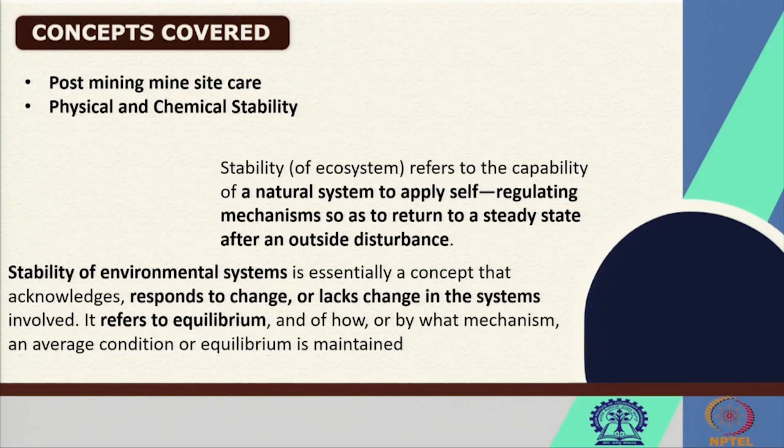Post mining site care is basically after the mining is over, when nobody will be there to take care of the situations. At that time, nature by itself should be able to withstand, to a certain extent, the disturbing forces that may be occurring. So that means we will have to maintain a stability.

This stability of the ecosystem there, that is whatever is existing there as life supporting, as your environmental conditions, their stability is required, so that the natural system by itself has got its self-regulating mechanism, which will be maintaining a balance, a steady state.

That is exactly where we will have to focus while designing or while recommending certain activities in the post mining site. So the environmental systems should be stable.

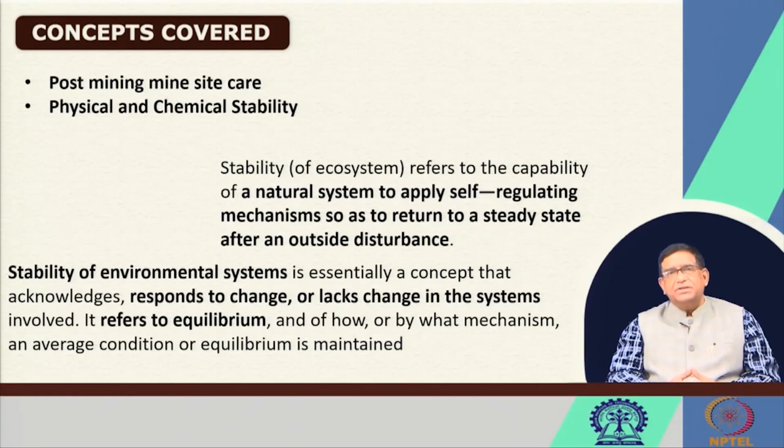That is, whenever there are any changing forces, any disturbing forces, if they come, then it maintains an equilibrium, so that the system itself comes back to its original conditions, or it is capable of withstanding the disturbing conditions. That is why physical and chemical stability are to be looked into.

So we can design when we know the factors that can affect the stability. In your studies for mining and mineral processing, you have already studied how to design a pit slope, design an overburden dump slope. You also knew how to design a tailing dam, and how you would exactly dispose of the chemicals over there. That is your STP, ETP - all these things are studied at different courses in your curriculum.

But today we will be knowing that, considering those factors when you design, what type of landscape you will be producing after mine closure. That is why mine site stability design is basically something you will have to take care of by proper landscaping. That landscape planning and landscape design will have to be done maintaining the chemical and physical stability.

So in today's lecture, I hope you will be able to identify the factors that affect the physical and chemical stability of the post mining site, and at the end of this you will be able to explain why we need post mining landscape design, and then identify the basic objectives of that.

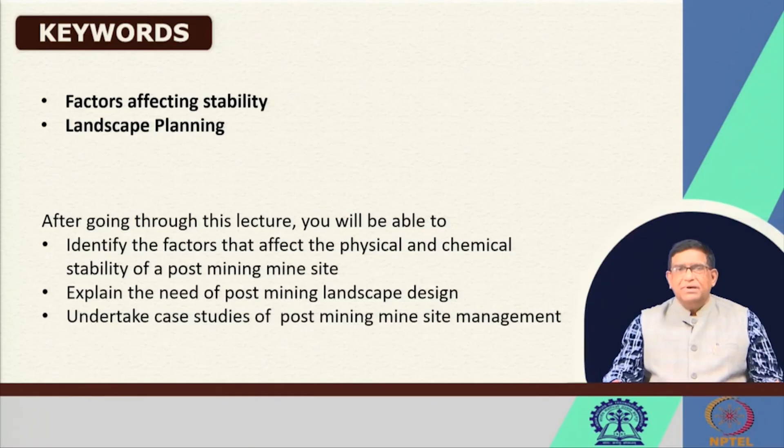So that you can identify whenever you go to any Indian mining site where we are lacking. There are many places in our Indian mining conditions where our post mining landscape design and stability management has got a lot of work to be done.

So, saying that the physical and chemical stability issues - you must know that the post mining site will be having some mining and processing waste, there will be residual structures, and there will be mined out structures: the pit, the benches - these are the mined out structures. Even the overburden dump, the way you have formed a heap, that is also a mining structure.

Now in these structures you can have different types of waste disposal systems. When you make an open pit, you have got waste piles, dumps. If you are having a hilltop, you can fill up the ridges, and there could be a dump over there. There could be a tailing pond where you can keep it. There could be a concentrator or thickener, from where you may bring a slurry pipeline to fill these tailing dams, and there could be an embankment - you have given and structured this bank, a dam is created over here.

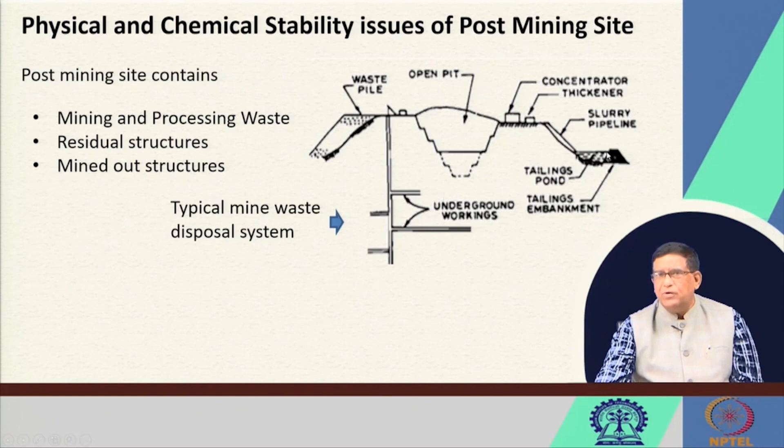There may be underground activities where you might have kept a lot of void, or which may be intervening your water resources, and all these situations may be there. Now, each of that can lead to certain instability. This tailing dam may collapse, the material you have kept may get slided down, then whatever water you will be putting over here, because of rain and all that, it can overflow and come out. Or if this particular slope gets collapsed, then the whole material will come over here, and if there is already water, that water and slush or mud may overspill and bury the whole area. So there is a lot of situations under which instability, a very difficult situation, may arise.

And then the chemical stability of that area is the resistance to attachment by chemical actions. In material science, a chemical substance is said to be stable if it is not particularly reactive in the environment during normal use. So wherever these materials are kept, how they may be reactive, if they spill and come over here, the whole soil can be destroyed.

If these particles get moved from here because of wind or rain, their chemical properties, if rainwater coming over here percolates down, it can become toxic, it may go to the water table, and then the water may become undrinkable. Similarly, the soil may be having a lot of heavy ions that can migrate from here, and they may give rise to effects going into the food chain and affecting your health.

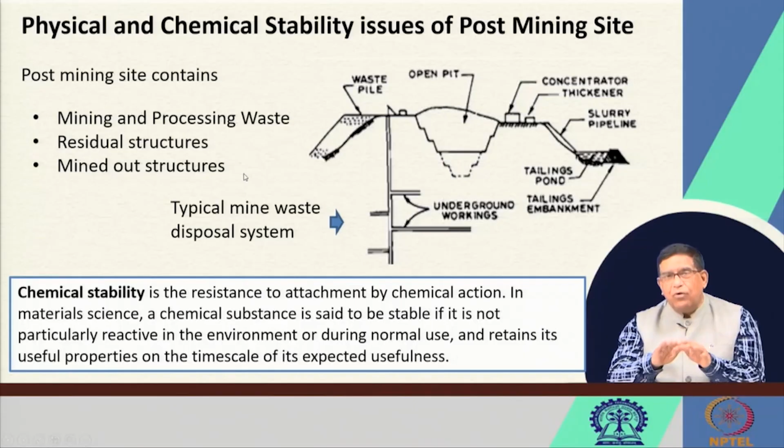So the chemical properties of this material, if it has toxicity, we will have to retain it, we will have to see that it is stable, that it does not migrate, does not move from one place to another. So this is chemical stability, meaning whatever way you want to keep it, you will have to keep it over there, and over the years that should remain normal and should not affect human health. But this does not always take place.

Now, if this type of disaster is to be avoided in the post-mining mine site, there is an issue that even after the mine is closed, after 10, 20, or 50 years, such problems may take place. This instability at the Chuquicamata mines in Chile was a big disaster, when the overburden dumped there collapsed, and the school below that overburden dump got buried, killing all the children over there. So that's why, even when it apparently looks stable, we do not know unless we properly study it. So the stability study is a very, very important issue.

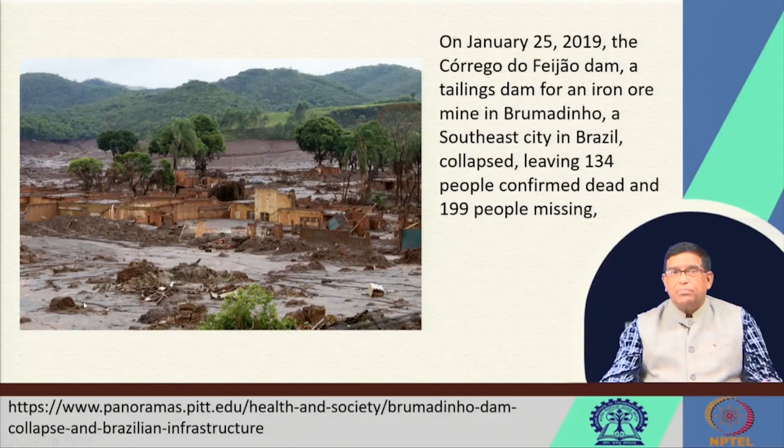And then there are many places, like for example the tailings of the Sukinda chromite mines of Tata Steel. The type of dam there is an above-the-ground tailing dam. It has been very well designed and is monitored, but if we do not monitor and keep track of its stability, in future it may also collapse. So that's why, wherever it is working well, you still cannot relax - you will have to take certain actions so that its stability is maintained.

So the physical stability of the site is the ability to remain physically unchanged, so that it should not collapse and give rise to problems.

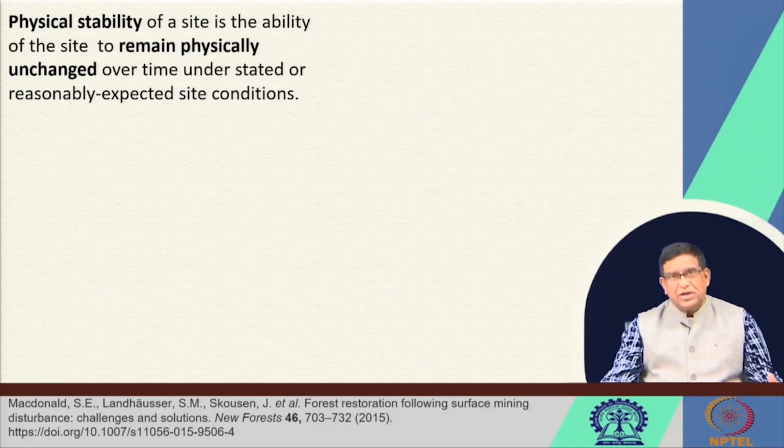Now, after the mining, you can see that the site is very unstable here, because unstable means that particles will be moving around. If such a situation is kept, they will be vulnerable to wind erosion, and under the rainwater there will be gully formations, there will be silt, and your fines will all be migrating from that place.

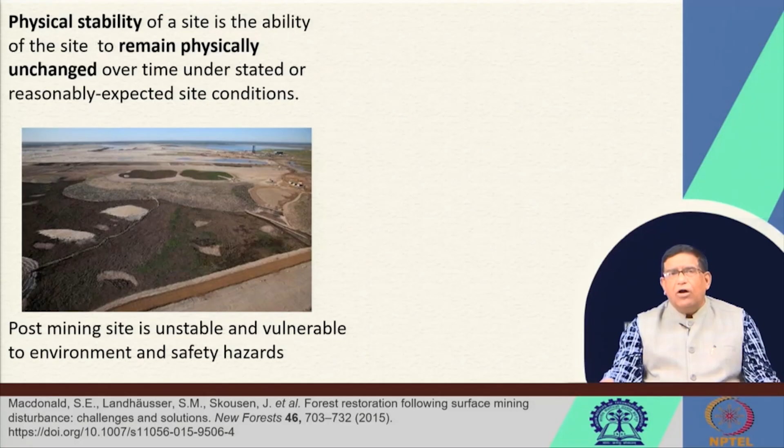But a stable site can be designed. This is one which has been designed and constructed. Now when they have given this grass cover, there will not be any wind erosion here. So you can imagine that it is possible. After the mining, care must be taken of the post-mining site, so you will have to go for landform reconstruction; after the minerals are taken out, the mining work is not over.

So that is exactly where your sustainability planning and your mine closure planning will have to be done, and these activities will have to be done with their economic aspects. That's why during mining you have kept your escrow fund, and I have been repeatedly telling you to do further research: whatever escrow fund has been kept in India is meager, very minimal. With that we cannot ascertain post-mining sustainability. For that we will have to do a lot of work.

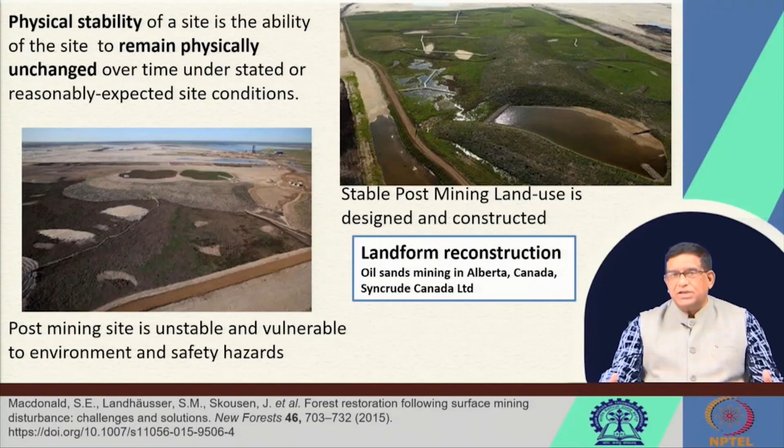Landform reconstruction is for the physical stability of the site, to remain physically unchanged. The matter of concern is the soil surface, dams, pits and water courses, because if the water courses, the rivers, the rivulets, the nallas get destroyed, it has a far-reaching impact. So there will have to be the required physical changes. We'll have to do the landscaping, stabilizing and enhancing uses. If you have small rivulets, that rivulet should not cause flood.

So some of the overburden dumps and materials can be used for creating an embankment, so that there is not going to be flood, because near a mining site, if there is a rivulet or river, definitely a lot of silt and suspended load will come from the mining area. And if at high flood time the river water floods, the nearby area will be getting all that suspended material. That's why bank creation is a job which will have to be done for keeping the stability of the neighboring area. Avoidable changes, whatever erosions, slides or ground movement are going to happen, can be avoided by proper planning.

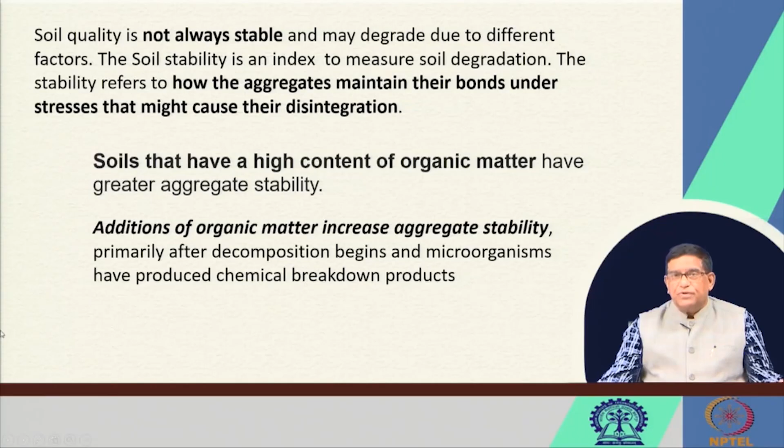So, the post mining site often has unstable soil, and that is why you have to see how you can stop wind erosion and rain erosion. There are different types of wind erosion that may take place. There may be surface creep, where particles of 0.5 millimeter to 2 millimeter diameter will be taken away by wind. This causes them to collide and dislodge.

Then when such particles start moving over the surface, they will further create some dust, which can also be taken out, and that is why near the mining area, because of surface creep, more fines get generated, and the suspended particulate matter in the air increases.

There is also another process of wind erosion called saltation, where medium sized particles of 0.05 millimeter to 0.5 millimeter diameter are lifted off by the air, but they get deposited after some distance. So that is why if there is a mining site, in the colony by the side of it, you cannot keep your clothes outside, because all these saltation products of wind erosion come and get deposited in your courtyards.

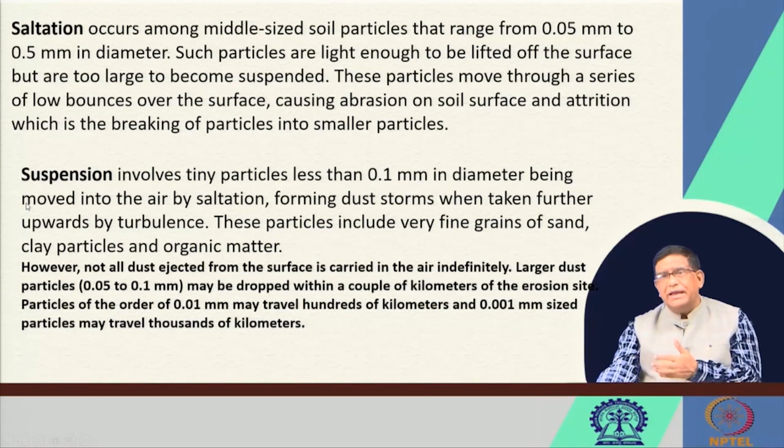Then the suspended ones are finer particles, they get carried away by the wind and can travel farther. So this wind erosion, due to the instability of the soil, has different impacts. You have studied in air pollution how it affects our lungs, how people suffer, and total disasters.

The other thing is the dumps. When you are putting the overburden dumps, there are a lot of factors by which their stability can be affected: what type of dump you have designed, their height, their slope, how the materials have been zoned, and what the potential failure surfaces are, how it may fail.

Those are the factors that will be affecting it, the location, where you have placed the overburden, whether the ground on which you have placed the overburden has proper bearing capacity to withstand that load. If not, will it be heaving up at a distant place? So the foundation should be of proper strength.

That is, what type of soil you have kept it over, what their moisture content is, are there any minerals below where you have thought of storing your overburden. Then the overburden materials, their grain size and size distribution, will be affecting the stability, how the particles may move, how they will be carried away by wind or water, or disturbing conditions by which the stability may be affected.

So the groundwater is another factor, how it is below there, and what the climatic conditions are, how the rainfall is coming, and also the method of mining you are following, because the way you are placing the dump material over there, whether you are placing it layer by layer or obliquely making a layer. So the method by which you are developing, and what was the original topography on which you have placed the material, all will affect how this stability will have to be maintained.

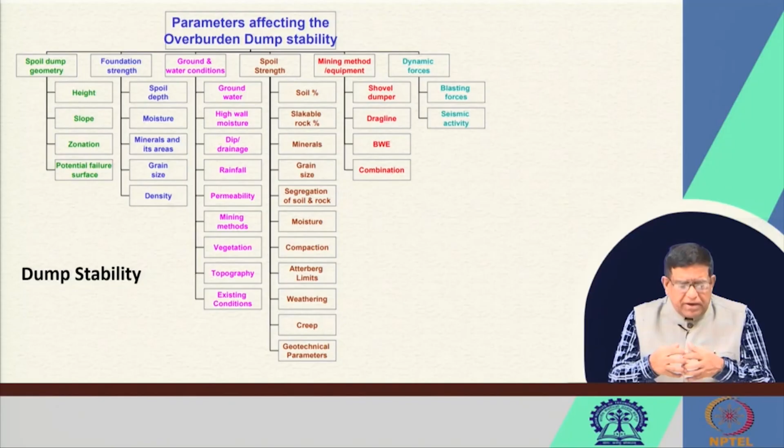Then the composition of the dump and the material properties: their grain size, their compressive strength, their shear strength, the moisture content, and in which way they are compacting. Sometimes when you keep the overburden for some period, because of their self weight, they start compacting. Whether that compacting is making it self-sustaining, that is self-stabilizing, or not. So these are the material characteristics and material behavior, how they will behave with water, whether in a mix of water they will become very flowable or more sticky. These things also will affect how the dump will be stable.

Similarly, your mining equipment: if you are using a bucket wheel excavator, you are bringing the material and putting it there by conveyor. But if you are doing it by shovel and dumper, when dumper and dozer move over there, a certain level of compaction will take place and it will become more stable. But if you are putting it by conveyor belt, the material is not compacted, so you may require another type of compaction there.

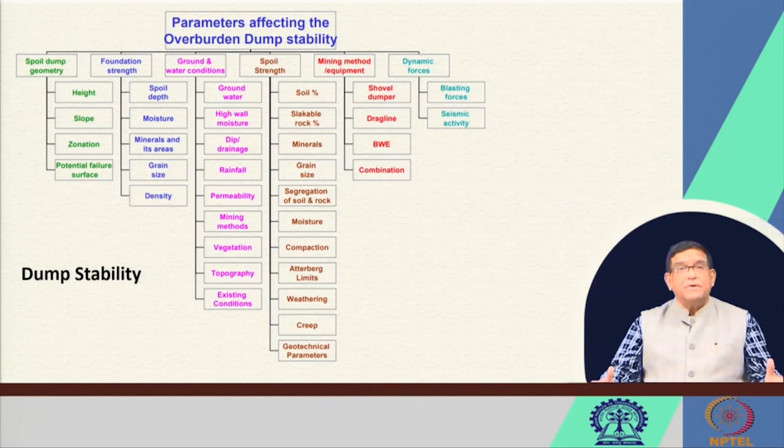So these types of things are there, and then in mining there will be a lot of blasting, and because of the blast vibrations, how your overburden dump is shaking, whether they can induce a failure. So these types of issues are there while maintaining dump stability.

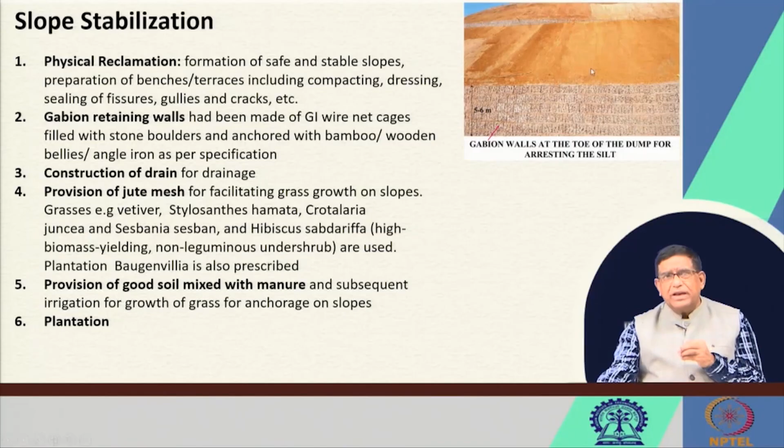Similarly, you will have to create drains so that between two terraces the rain water is drained in such a way that you do not increase the pore pressure to destabilize the geometric design or the stability of the dump. Sometimes they put a jute cover or a geotextile cover so that erosion does not take place. Similarly, for the soil, you will have to place some manure there so that grass can come, and then the plantations will be done.

So you can see here how a technical reclamation is done on the overburden dump: there is a drain, you have got the slopes, you have got the gabion, and then soil over the slopes, and on that they have done the plantations, in the Northern Coalfields Jayant project, how beautifully they did it. But you cannot assure even such management under very heavy climatic conditions; in very heavy rain this whole thing also collapses occasionally.

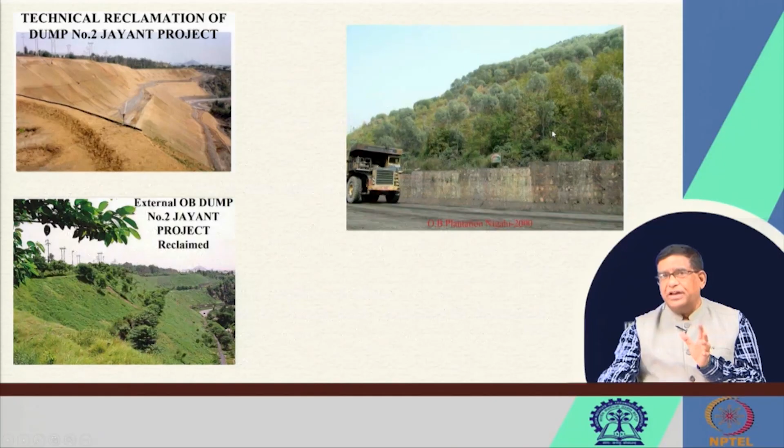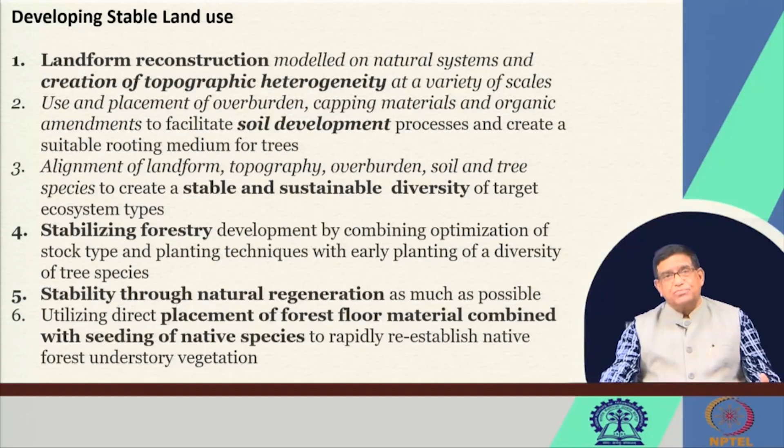So landform reconstruction is another way of stabilizing. To stabilize the site you will have to do naturalization through forestry. Forestry development stabilizes the post-mining site in the best way, and for that there are different recommended approaches. You can refer to Macdonald et al.

Then we will have to create a particular landform, and then we will have to use the topsoil, and the topsoil will have to be properly developed and amended; I told you before how we used Panchagavya for amending the soil. Then soil and nutrient recycling, all these things will be done. At the same time, geotechnical stability, a stable site will be created, and then revegetation will start, and with this revegetation a small artificial forest will come, and tree plantations will be done. Then you will have to align the topography to the next extent of it.

When you have developed a manageable forestry, manageable greenery, then we will have to bring the concept of food forest that I have been telling you. In the mining area, whatever vegetation has been done, those vegetated areas are now to be turned into a useful forestry, and there, in the food forestry, the local food wisdom will have to be brought, and then we can create a food forestry. So that is how the whole thing can be stabilized.

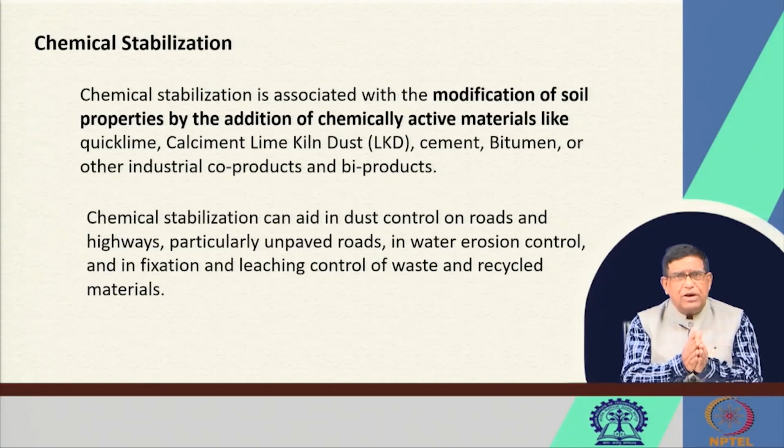Now, chemical stabilization is the modification of the soil properties by the addition of chemically active materials; if you have an acidic soil, you will be giving some alkaline matter. If you have an alkaline soil, you will be putting things that lower the pH value. Chemical stabilization will be necessary sometimes for dust control and road management, because if there is no bonding, you use some chemicals so that the soil particles bond together and you can make a road. So that type of chemical stabilization is done.

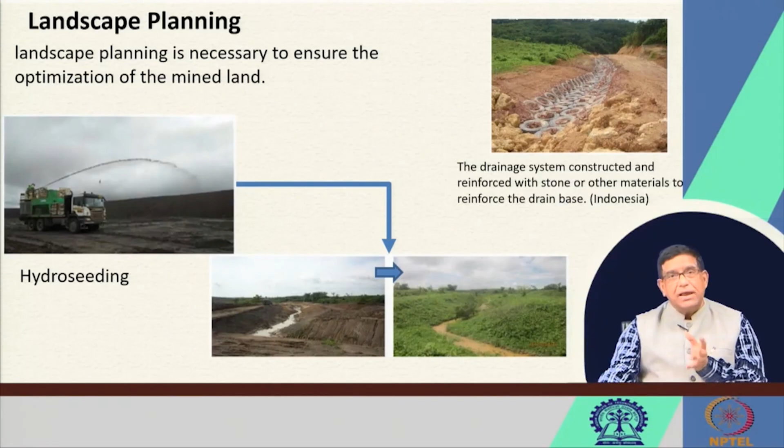Next is the whole landscape planning. In mining, a very good idea is this: when you want to create a drain, at the mining site there may be a lot of old tires. Using the old tires, you can put the moram and other stones on them, and this will give a very good drainage pattern. Then over that whole area you can do hydroseeding, and with hydroseeding and a proper drainage pattern you can create a new landscape, and that is how the mining site will be transformed into a stable and self-sustainable site.

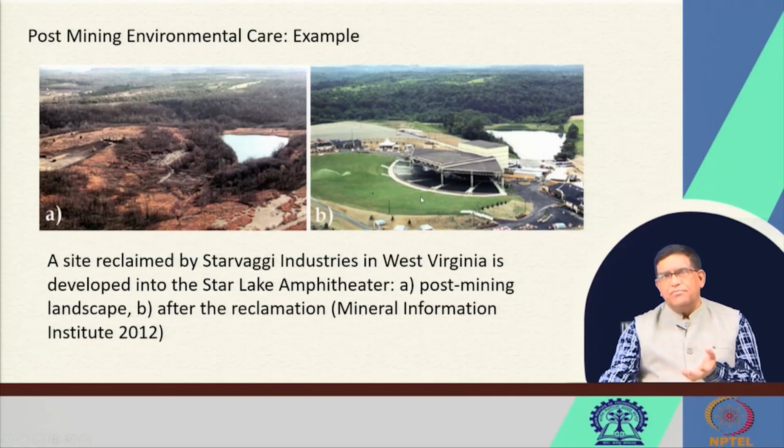So this is how the post-mining site will have to be stabilized physically and chemically, and a new landscape will have to be brought. Post-mining landscapes lose their previous aesthetic, ecological, and socio-economic values. That's why we have to do the stabilization physically and chemically and bring stability to the post-mining site. This will require a lot of careful analysis of the site. You will have to do a scientific study of it, and for that you must read.

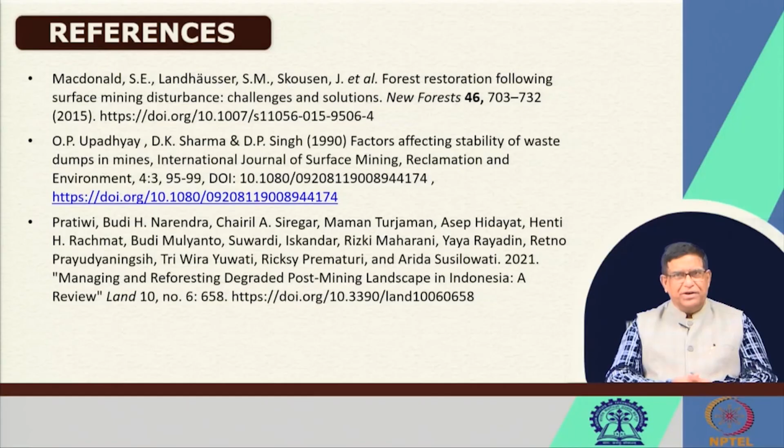Read what others have done and how they have done it. So I always encourage you to collect case studies of what others have done, then ask why we cannot do it, and do it in a better way because we are Indian. So with that, I hope that you will be taking up case studies to do something good.